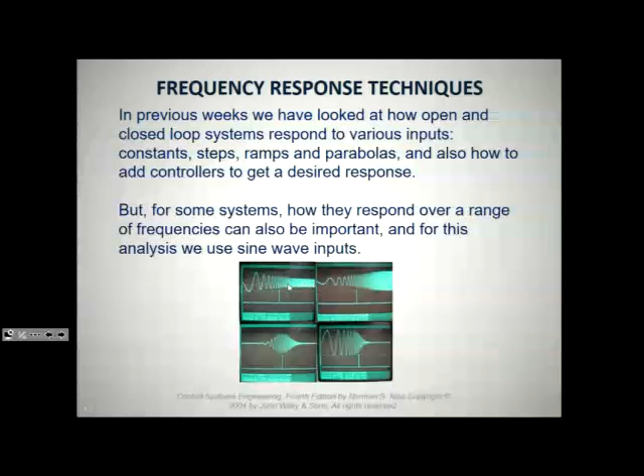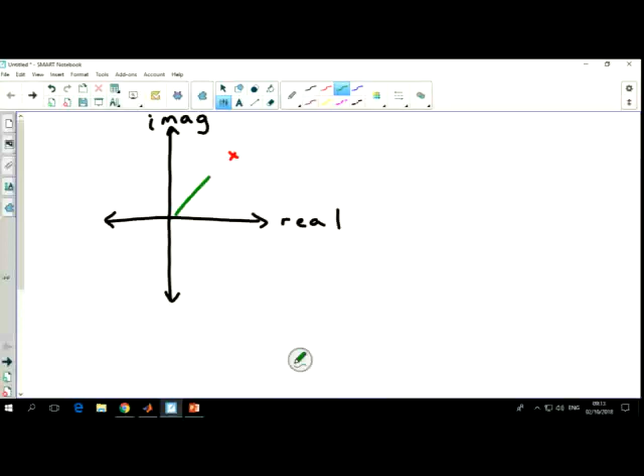Now, to do that, we need to use complex numbers. I did a bit of revision on complex numbers in week 1. So you remember there's 2 ways of representing complex numbers. Well, there's a few ways. On an Argand diagram, your x-axis is the real part of your number, and your y-axis is the imaginary part of your number. Maybe just do a wee bit of revision on these before we go further. Stick to an easy one here, maybe point there. So if you want to represent that dot, you can do it on an Argand diagram like that. Remember, we're thinking about phasors mostly, so in fact, it probably would be like this.

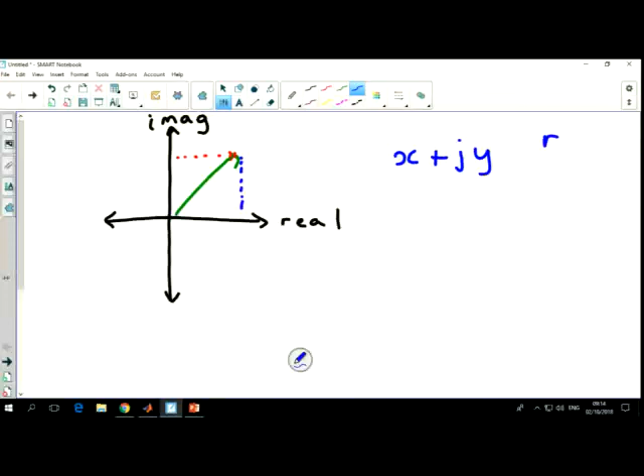There we go. So if I represented that by an x-coordinate plus, you remember what the form was called? What kind of complex number that is? No. Okay, that's rectangular, or your Cartesian coordinates, yeah? They're interchangeable. I think MATLAB calls it Cartesian, but you'll quite often see rectangular. So that's one way of representing a complex number.

It's terrible. I'm just going to try and recalibrate it. I think it was a bit off. Made it worse. That's meant to be an X. That's a bit better. I'm not sure.

Okay, the other way is by length and an angle. Yeah, so this is just a revision from what we did in week 1. So you have an angle here and a length. So you can also represent that same phasor by that. Yeah? And that's your polar coordinates. So just to remind you of that.

A couple other wee things. I don't know, did I do this with you in the first week? If you're adding complex numbers, you use them in the rectangular form. Okay, so plus or minus, you use rectangular form. And divide or multiply, you use polar. Do you remember how to do that? Yes. Yeah, okay, that's fine. I won't need to go over it. So you are going to do a wee bit of division and multiplication of these numbers.

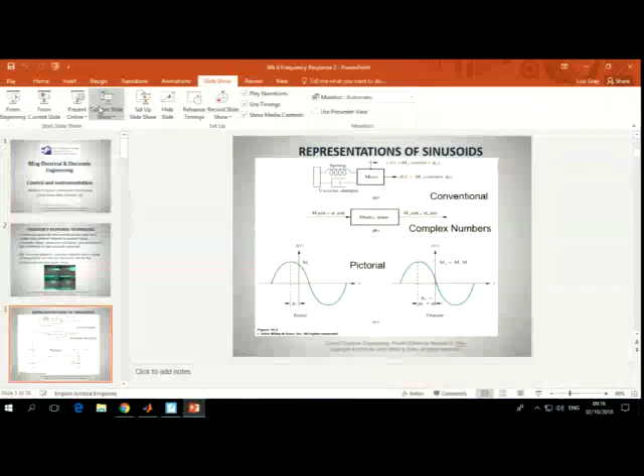So there's just a couple of other ways that you can represent a sine wave using these complex numbers. So that's the amplitude, in this case peak amplitude. Anybody who's doing principles with me, you know we normally use RMS, but for control theory we use peak. And then the phase difference between a normal sine wave, although that one's shifted, and the wave you're interested in.

So you can see here, I don't know how clear that is because my projector's not great, but this is our system represented using complex numbers. So it's got amplitude and a phase, which will affect the input coming in here, which has an amplitude and a phase, and give us an output here, which has an amplitude and a phase.

Okay. So I guess in terms of the system, this is like the transfer function, but it's in a different domain. So far you've looked at time domains and S domains, and now we're looking at frequency domain, which is what that's in. So for instance, if you were to put an input wave in like this into this system here, which has this amplitude M1 and this phase shift from a normal sine wave of theta 1. That's not theta, what's that, phi 1.

And then what came out is very likely to be something that's changed in amplitude and also has a different phase shift. Systems often do that. For instance, I don't know if you know much about op-amps, but an inverting op-amp would give you a 180-degree phase shift. A transformer wound in two different directions gives you a 180-degree phase shift. So you can consider them as systems, and they're causing a big phase shift to an input signal, yeah?

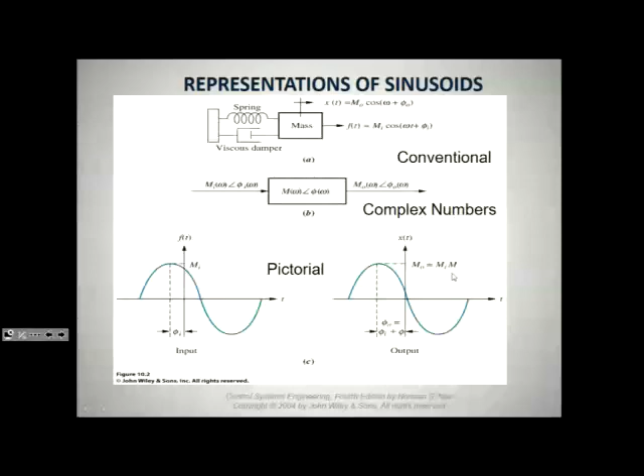Okay. So we can then rewrite the system transfer function as we did, as an amplitude and an angle, which is what we're talking about there. When we talk about angles, we might be talking about radians, or we might be talking about degrees. They're pretty much interchangeable, just with a magnitude factor.

Okay, so if we want to look at how our system responds in the frequency domain, what we can do is take our Laplace transformed system, so that's the one with all the S's in it, and change all the S's to a little term called J omega, where omega is frequency in radians per second, and J, what's J? Do you think? Square root of minus 1. Square root of minus 1, yeah. So J is your complex variable, yeah? Well, it's not a variable, it's a constant, complex constant. Square root of minus 1.

So what we do is we take the S domain system and we change all the S's to J omegas, and then we put in different values of omega and find out what the resulting amplitude and angle is. Yeah, so of course, because we're using complex numbers, as soon as you're working with complex numbers, you're always working with amplitudes and angles, and that's the reason for using them mainly, because it's quite a good way of showing amplitudes and angles, just using numbers.

Yeah, so that's why we use them, because not only can we find out the change in amplitude, but we can also find out what's happened to the angle, if it's shifted or not. So we've got three different ways of doing this.

Now, we tend not to do it on a linear scale, because the idea is that you're changing this frequency from 0, DC, right up to very, very high frequency, infinity. Now, if you tried to plot that on a linear scale, if you imagine trying to go from 0 to, I don't know, 100,000 on an x-axis, you're not going to see small changes, say, between 1 and 10 hertz. You wouldn't see any change on your scale. You wouldn't even be able to plot it, probably. So what we tend to use is a logarithmic scale for both the frequency, which is your x-axis on the plots, and your amplitude, which is your y-axis.

And again, that's because your amplitude can vary a lot. So at very low frequencies, you might get a very high amplitude. This is the way circuits usually work. You might get, I don't know, 50 volts or something like that, if it's a high power system. And then at high frequencies, that might have gone right down to 0.

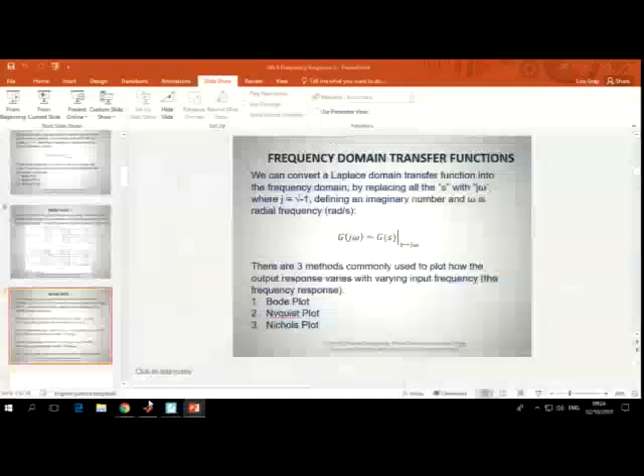So generally we tend to use a computer to do these, and MATLAB's fantastic at doing these. I can show you on MATLAB. Maybe I'll show you it now. So we can define a system. I'm just going to make one up. I don't know what sort of Bode plot it will have, but, trying to remember how you do this. I think that's a comma there.

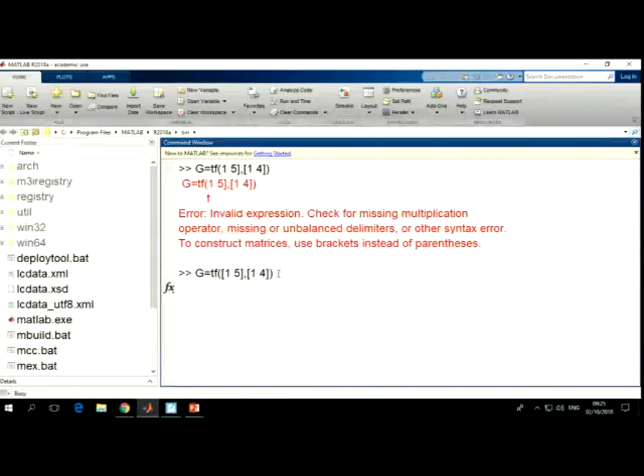Okay, so if I run that, I forgot to put the first bracket in there. Yeah, I forgot to put the first square bracket in. So do a bracket there. Okay, so I've just defined a transfer function. See, I just typed that in, so you can get used to doing this yourselves.

We talked about poles and zeros last week, I think, didn't we? And pole zero diagrams. So what's the system got in terms of poles? How many poles has it got? One pole, defined by the denominator. So it would have a pole at minus 4? Yeah. What about zeros? 1. 1 zero at? Minus 5, yeah.

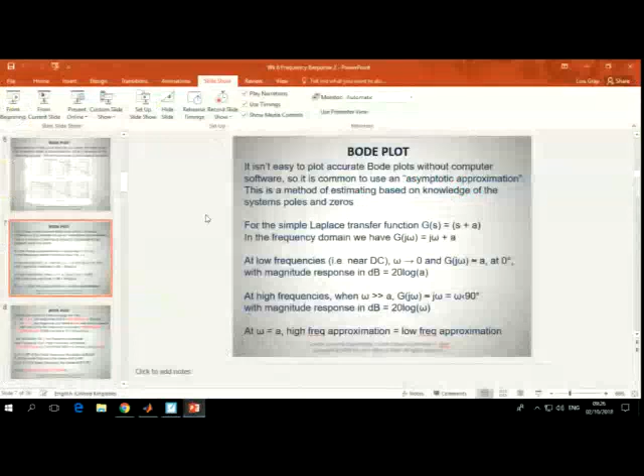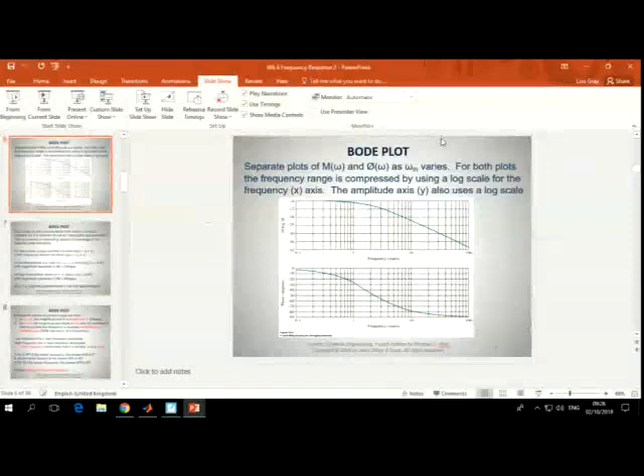Okay, so actually they relate to the points on the frequency graph. Switching back to this frequency graph. They relate to these points where the slopes start to change. So in fact, that point there would be a pole. And a zero would cause a slope going up the way. But we'll talk about that in a minute. Let me show you how to do this. So I can do a Bode plot of this system if I just type in bode G. I think that should work.

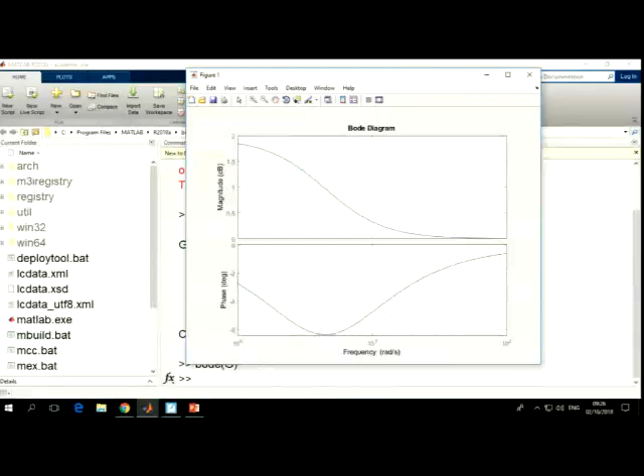No idea what it's going to look like. Probably a straight line since I've got one pole and one zero. Okay, it's not a straight line, that's fine. Okay, so that was just a completely random function, but here you can see how it's done the Bode diagram really quickly for me. This is the amplitude, and that's the phase. I just wanted to show you that. We'll do a bit more on MATLAB later on, but just while I was on that page anyway.

Okay, so we're going to look at some simple functions to start with, some simple systems rather. So we've got, first of all, a system with just a single zero. So that's just a numerator. There's no denominator there. So replacing the s with j omega, like I said to do, and then looking at what happens to the function as omega is put to different frequencies.

So we can start by making omega 0, which is effectively DC. So that's not putting a sine wave into the system at all, that's just putting a DC signal in. If you make omega 0, then you end up with this function just being equal to A. Okay, so we could work out the amplitude of that system just by doing 20 log of A. And there's no phase shift there because we've got no imaginary part. If you only have a real part, you have a 0-degree phase shift with a complex number. Does that make sense? So that's along the x-axis, essentially.

And then if you go into high frequencies, so we're making omega much, much bigger than A. So saying that maybe omega's, I don't know, 100,000 radians per second or something like that. It's very unlikely A would be anything like that sort of number. So A kind of disappears in the equation then, and you're just left with the j omega part. And if you convert that to your complex numbers, that gives you a magnitude of omega and an angle of 90 degrees. Because referring back to our Argand diagrams, anything that just has a j term is along the y-axis.

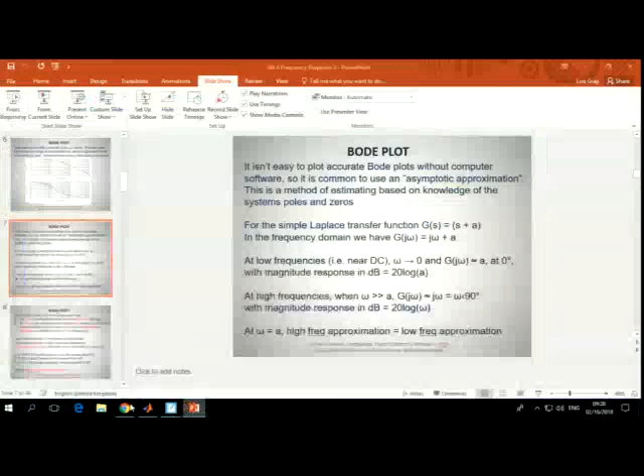Do you want me to show you that? Just switch back to that. Yeah, so anything that's just got a j term is just going to be on this axis here. So it's obviously got a phase shift of 90 degrees. Okay. And then at the frequency where omega is actually equal to A. So this is called our low frequency approximation, and this is our high frequency approximation. And if you make omega equals A, they actually become equal.

So what you find out is, for this particular system where your system's defined by s plus A, that's your Laplace transform of your system, at low frequencies, you've just got a straight line, which has this amplitude. At the point where omega equals A, in this case, this will start to rise because it's a zero. Okay, so it starts to rise with an increase of 6 decibels every time the frequency is doubled.

And of course, you could actually work that out. If you go back to here, you could have put in different values of omega, and you would actually get an answer here if you had real numbers. And you could plot that manually, plot by plot, and you would see what would be happening. But you can just believe me that when you have a system with just a zero, it'll start to rise, and it'll rise, we normally use this term, 20 decibels every time the frequency goes up by 10.

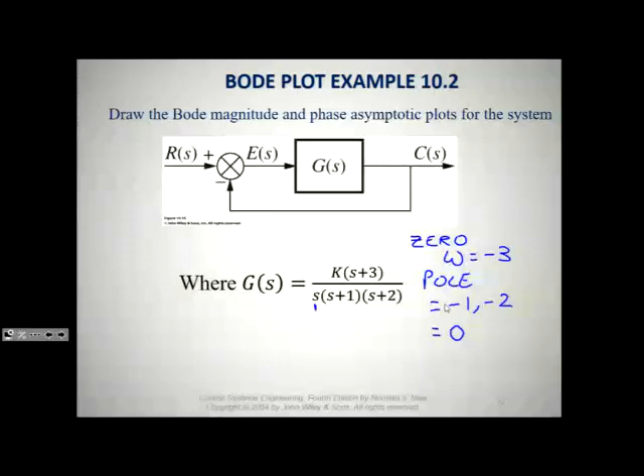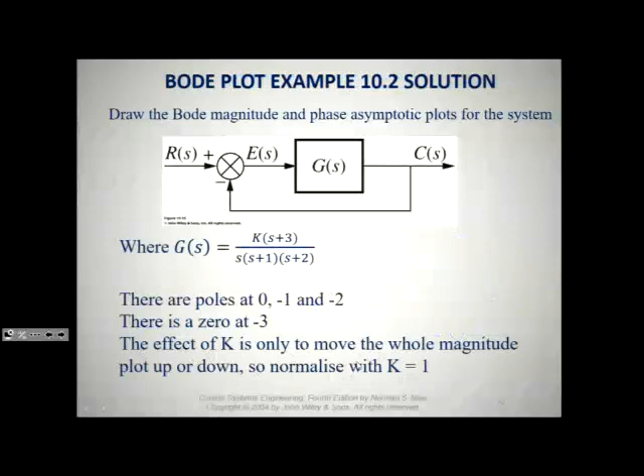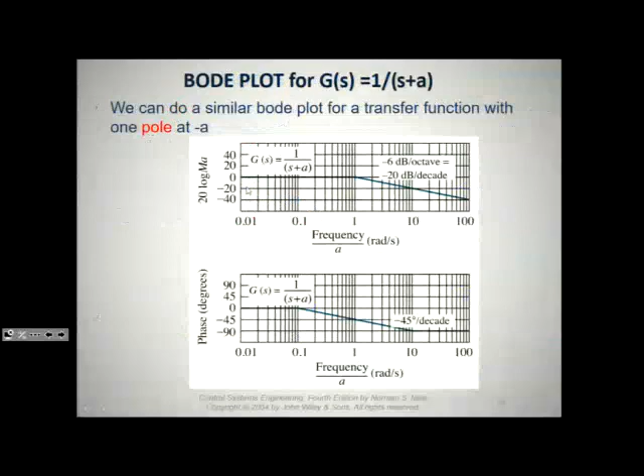But we don't know K, so I'm not terribly sure how we're going to plot that. Maybe just assume K is 1. That makes sense—everybody understand that okay so far? I'll show you the plot then. There's the answer, which you got, which is good. So we're going to start with K equals 1. It says here the effect of K just moves the whole graph up and down. If you change the gain, this point will go up, so the whole graph will either go up, or if it's a low gain, it'll go down.

So even by the time we get to 0.1 radians per second, we're already going down at minus 20 decibels per decade at that point. And then we've got another pole at minus 1, which is going to cause another minus 20. Another one at minus 2, which is going to cause another minus 20.

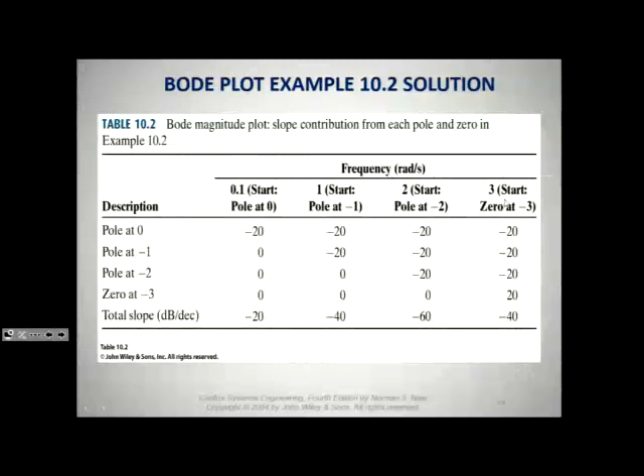It's probably easier just to show you the graph. And at this point, the zero is going to have an effect and negate minus 20 of that, so it'll not drop so steeply, but once it gets to 3, it'll drop at minus 40, I think. I did try and draw that—it's not possibly very well drawn, but hopefully you're able to see it.

So this slope here is due to the pole at 0. This slope here is due to the pole at minus 1. This slope here is due to the pole at minus 2. And then you can see here it's gone back to being more like that, and that's due to the zero at minus 3. Does that make sense? Yeah.

They're quite difficult. What do you mean it's due to zero? What's that—it's due to zero? How does it change? This is due to zero at minus 3. How come it's plus 20 then? Because of the zero on the top line.

So going back to—every pole gives a minus 20, every zero gives a plus 20. Oh right, yeah, so that cancels out one of those. Yeah, cool, good—that's good if you ask questions because it means you're actually listening as opposed to just sleeping. Right, okay, so that would be a magnitude plot. The magnitude plots aren't too bad.

Trying to do a phase plot of this would be actually very difficult to do manually, because obviously the pole at 0 is going to have an effect. You can't really get a tenth of 0, but it's going to be already minus 45 degrees down by the time you get to...

0. And then it's going to still be minus 45 by the time you get to this 1. And then that's going to have an effect as well from 0.1 up to 10. So they all overlap each other, and it does get really, really difficult to plot phase. So I don't think I've done a phase—they've tried to summarize it here, but I don't think I've actually done the plot.

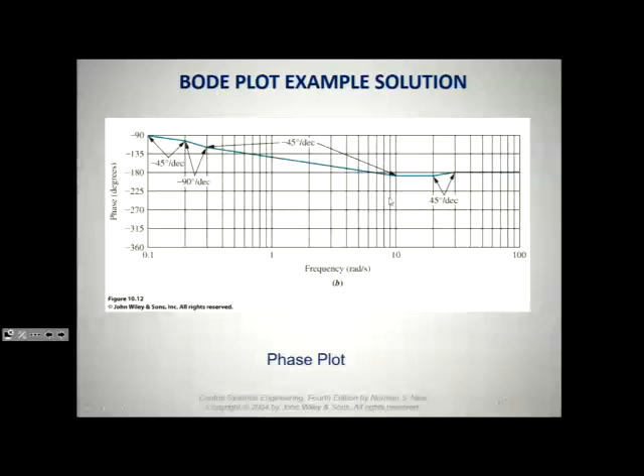Okay, so you can use these Bode plots to determine whether your system's stable. What do I mean by stable? What does an unstable system do? Yeah, it oscillates continuously and probably eventually breaks.

So that's unstable. In fact, to be honest, a system that oscillates continuously at the same amplitude is a critically stable system. But a system where the amplitude builds as you put the input in, that would be an unstable system. But yeah, quite right, a stable system. So it's quite important to know whether our system's stable or not at a range of frequencies.

Because we don't want, for instance, a damper on a car - if you go over a particular level of bumps, you don't want the car to bounce bigger and bigger until your shock absorbers break, yeah? So you want to be able to check this.

So the definition of stability is that, with negative feedback, if the gain of the feedback is greater than 1, or if the gain of the whole closed loop system is greater than 1, while the feedback is still negative, you have instability. You can write that in terms of mathematics by saying you have to have a gain of less than 1, which equates to 0 decibels. If you do 20 log 10 of 1, you'll get 0 decibels. So that relates to a gain of 0, a gain of 1, and this relates to a phase change from negative to positive feedback.

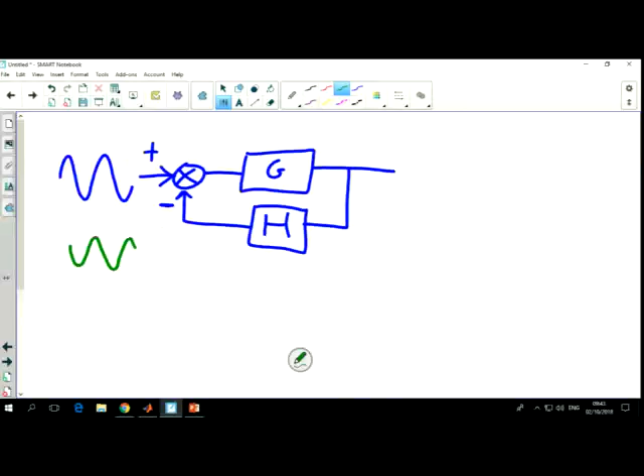By the time this all comes back, you get another sine wave that's in phase with that - sorry, no, 180 degrees out of phase. I don't know if I've drawn that very well, but it's 180 degrees out of phase. And then you subtract that. What you're actually going to end up doing is flipping this over and then adding it, so you end up with positive feedback.

So it's okay if the gain's really low, because what you're adding will be very small. But if the gain's 1 or greater than 1, you're essentially adding the same size of wave to the one you're putting in, and that's going to make your output much bigger, and it's going to make it unstable. So that's what that criteria is defining - that you still have negative feedback. You don't need to remember that, it's just illustrating why that's important, or why it means what it means.

Okay, so with our Bode plot, we can work out whether we have a stable system, and we can also work out: can we add more gain to the system? Maybe our output's a bit small and we want it bigger. Can we add more gain without making it unstable? Can we add more phase shift without making it unstable?

So we've got two terms here. We've got a term called the gain margin, which is the amount of gain you can add before it becomes unstable. And you've also got a term called the phase margin, which is the amount of phase shift. So if you had a system and maybe wanted to change a sensor on it, you might want to check that it's still going to be stable.

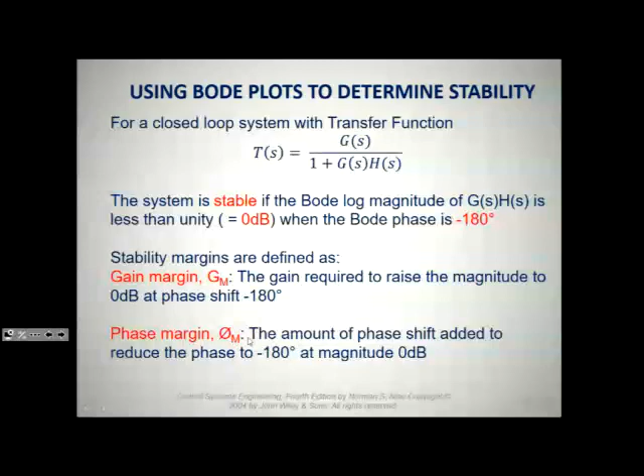You can measure them on the Bode plot quite easily. With the gain margin, if the system becomes unstable at 0 decibels and minus 180 degrees phase shift, the gain margin is the amount of extra gain you can add before you reach that point. The phase margin is the amount of extra phase you can change before you reach that point.

You can read them on the Bode plot quite easily. So for instance, if you had a Bode plot that did something like this - the interesting points are 0 decibels and minus 180 on your y-axis. Looking back at your graphs, the points we're interested in are the ones that correspond to those two conditions.

So if your magnitude plot did something like this, here is the point at which the phase shift has reached minus 180. Remembering these are frequency axes, and they're both the same frequency axis, this would be the frequency in radians per second at which the phase shift has become 180 degrees - that's your minus 180 degree point.

So you could actually add this much gain - you could shift the entire graph up by that much before it would become unstable. Now you wouldn't want to do that, you wouldn't want to shift it so that that was on that point, but it gives you a measure of how much you could shift it by theoretically.

Obviously you don't want it actually at that point because environmental factors might play a part, gains might change, and then you could end up with an unstable system. But anyway, does that make sense? Can you see that okay? Yeah, the same applies with the phase shift.

With this particular system, we have a phase round about a lot less than minus 180, maybe minus 90, minus 20, I don't know whatever that reads, at the point where the gain has dropped to 0. Gain normally drops because there's normally more poles in your system.

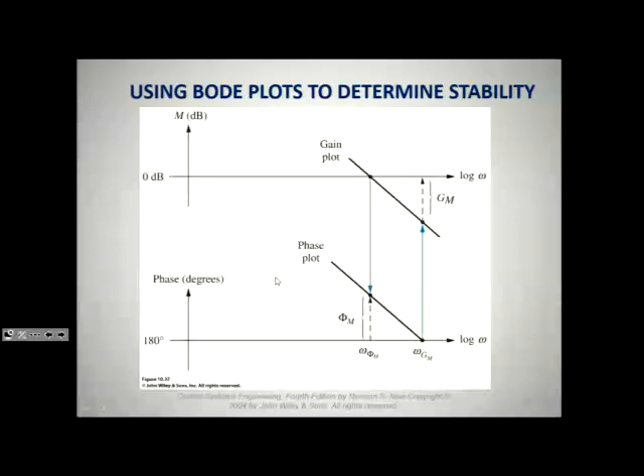Okay, so here's another example. In this case, h is just 1, so we don't need to worry about plotting GH. Normally you do plot GH, but h here is just unity feedback, so there's no transfer function in the feedback path.

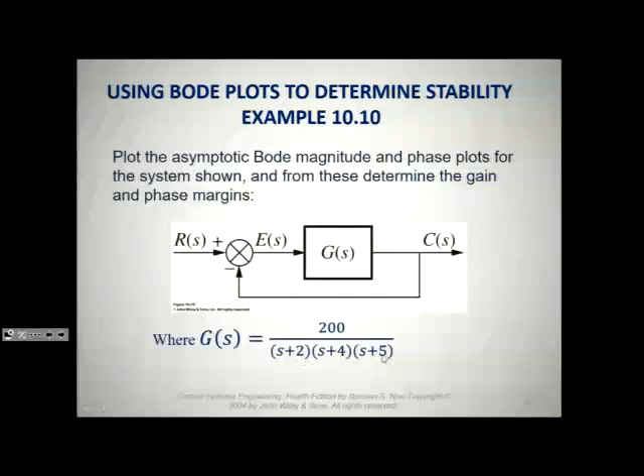So you can see here, this system's got 3 poles, at minus 2, minus 4, and minus 5. It's also got a gain term of 200. So our straight line point on the graph would be 20 log 200, whatever that works out as. Then the gain or magnitude will start to drop at 2 radians per second, 4 radians per second, and 5 radians per second by different amounts.

There's no real reason to multiply that out, I don't think - oh yes there is, because it gives us our low frequency point. Normally you change it to j omega, but you can do it with s as well. What we've really done here is made all the s's equal to j omega, and then made omega equal to 0. So when omega is 0, that term will disappear, this term will disappear, and this term will disappear, and you're just left with 200 over 40 - that gives us our gain at DC frequencies.

S tends to 0 is DC, or j omega tends to 0 is DC, of 20 log 10 of that, which worked out as 14 decibels. And then we know the breakpoints, we've already talked about them. So the first breakpoint is going to give us minus 20 dBs per decade, then minus 40, then minus 60. That makes sense, okay? Everybody still following?

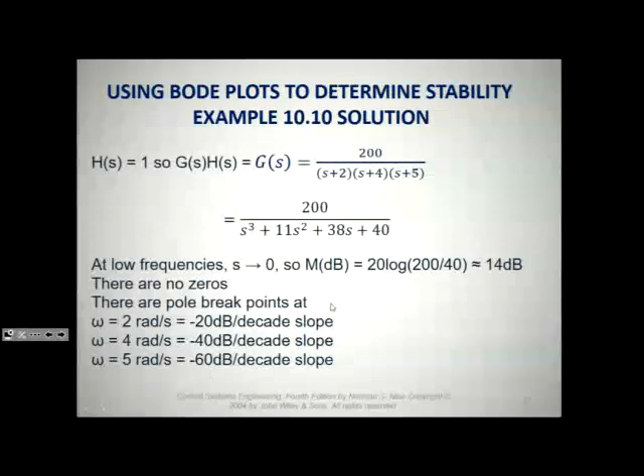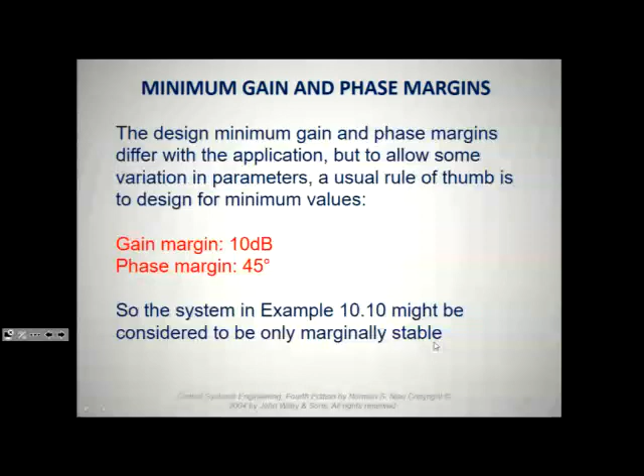Okay, now there's 2 more kinds of plots. If you don't like Bode plots, there's 2 more plots you can use to get these gain and phase margin measurements from. I think the next one's a Nyquist one, which is a really hard one to understand. In terms of Nyquist, I wouldn't worry too much about the theory of how the Nyquist plot works, but just be able to read the plots. There's a bit in the slides about the theory, but we're not too bothered about theory.

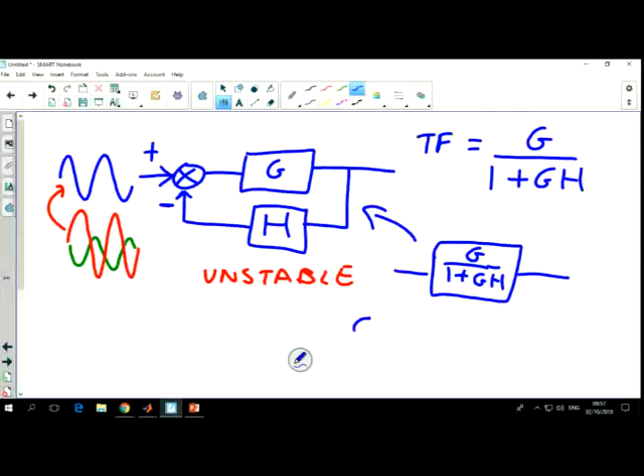Okay, so the transfer function of this actual system, and I'll show you this when we do the block diagrams, is G over 1 plus GH. So you could redraw that system as a single block, and that's exactly equivalent to that. You don't need to worry too much about how we get to that, because we will look at that later. So obviously, if we're just looking at GH, that's not the transfer function of our system. That's the equivalent open loop transfer function. So all these frequency plots are done using just that term there, but they still tell you how the closed loop system is going to respond.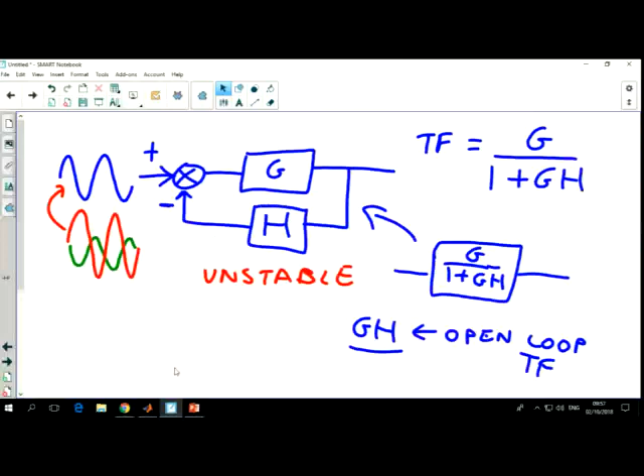I know it's a bit difficult to understand that, but the Nyquist theory kind of explains why they do that a little bit. Does that make sense? Understand what I'm talking about there? That just multiplying G times H doesn't give you the full transfer function? Okay, if you don't understand, you just have to believe me for the moment. We'll see about it next.

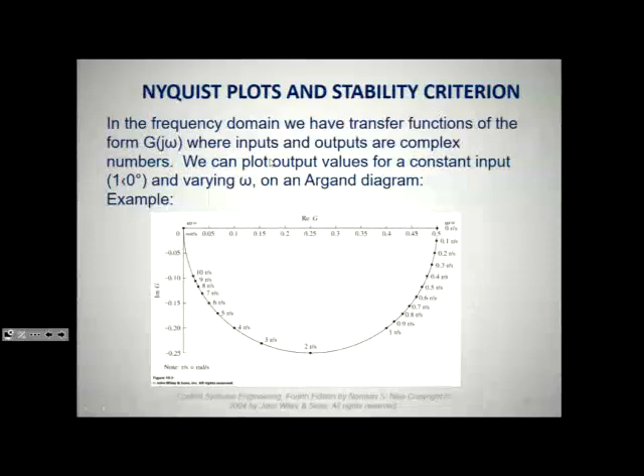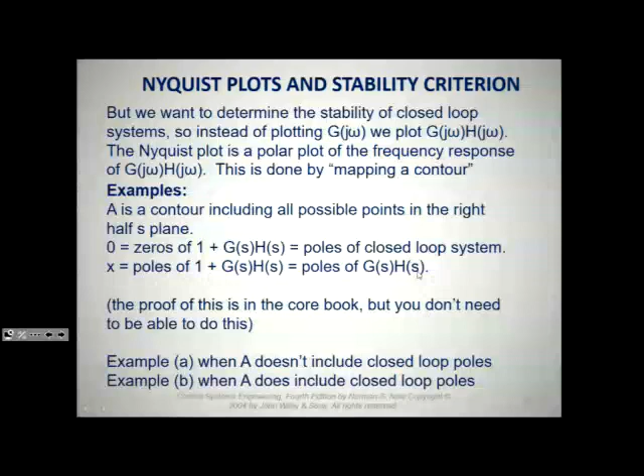Okay, so what we're actually plotting on this diagram is GH, not G over 1 plus GH. And because of that, the poles and zeros don't exactly correspond to the poles and zeros of our actual system. But what you find is that if you plot 1 plus GH, the zeros are actually the poles of the closed loop system, and the poles are the poles of the open loop system. You don't need to be able to do the proof of that, just believe me. We'll also miss that, because that's about plotting, but it's basically showing you the difference between a stable and unstable system.

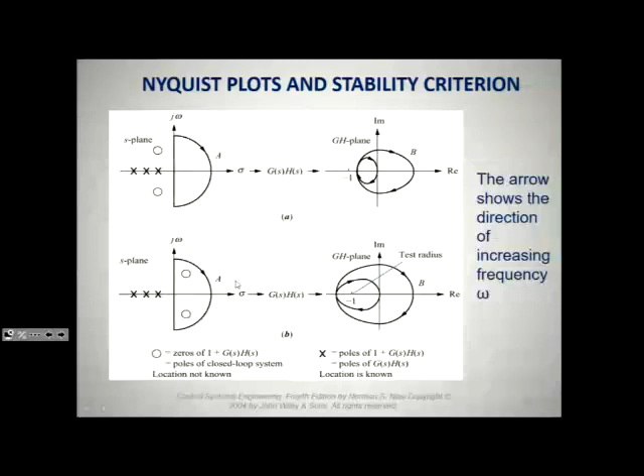So these are zeros, but they become poles of the closed loop system, so that would be a stable system. And this would be an unstable system, because these zeros would become poles and they'd be in the right-hand plane. Did I tell you about that last week, about stability being the left-hand plane? Okay, right. Well, don't worry too much about that just now. We'll also just skip that for a moment. I don't want to make this too difficult for you.

So that's just explaining how this plot works. So at low frequencies, the j omega term disappears, essentially, and you end up with just a straightforward k over a term and an angle of 0, because it's only a real number. K over a is a real number.

And then at high frequencies, the j omega part becomes really big, so you end up with just k over j omega, which tends to 0, because j omega is really big. If you divide by a really big number, you start to get towards 0. So that tends to 0, and your phase shift is actually minus 90 because omega's on the bottom line.

So that term's got a phase shift of plus 90, but when you divide by plus 90, you know if it's a denominator, you then subtract. So it actually becomes a phase shift of minus 90. I don't know why that's a plus there.

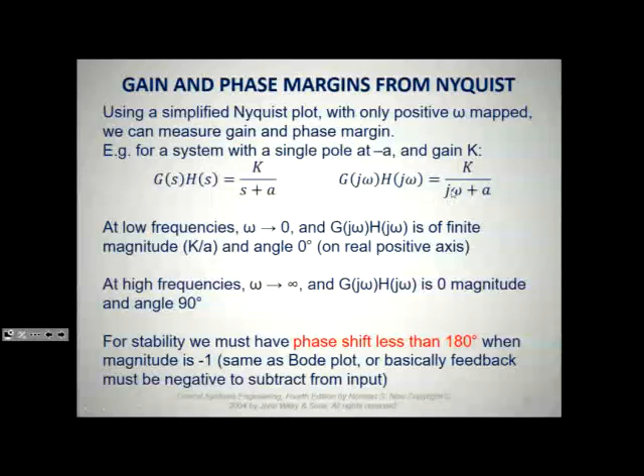So looking at that on the diagram, it looks really complicated, but it's actually not that bad. So this is the phasor that we're plotting while we're doing these diagrams. And we're starting with omega equals 0, so your phasor would be here. Don't draw on that. That would be the phasor when the frequency equals 0.

There's not much to go, guys, honestly. And this is quite tough.

Right, so when omega is 0, that would be a phasor there, which would be on your real axis, yeah? For that one, that would be k over a amplitude. So the length of that phasor would be k over a, the diagram we had before. And then what we're going to do is increase the frequency going around that way. So you might have 1 radian per second, 10 radians per second, 100, and so on.

And watch what the phasor does as we do that. So it's going to change in amplitude, and it's also going to change in phase shift, obviously, as the imaginary part gets bigger. Because that was our function, yeah?

So you can work out the gain and phase margin from this graph as well, because the frequency at which the length of that phasor becomes 1 is equivalent to a 0 decibel crossing point, yeah? So that green is equal to 0 dB. And obviously, when it gets to...

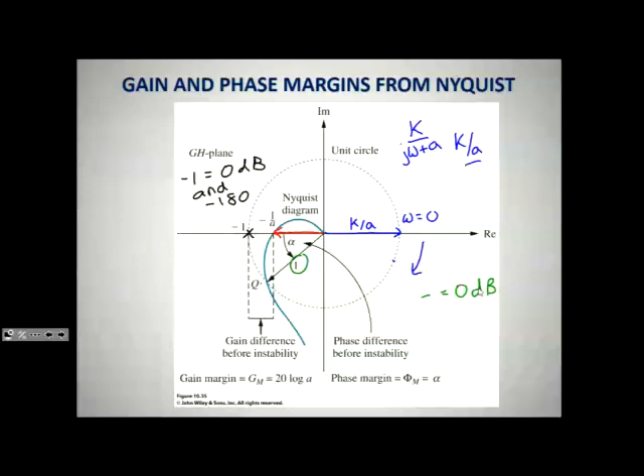So measuring from there, we can measure the phase margin very easily. The phase margin is just that. That's how much we could sweep that amplitude 1 phasor around before it crossed this point. Makes sense? And the gain margin is actually,

what you measure on the graph is 1 over A. It's to do with the fact you've got the division there. So what you're measuring is 1 over A, but the gain margin is actually 20 log10 A. So say you measured 0.5 there, just as an example, then your gain margin would be 20 log of 2. But it's all related to that minus 1 crossing point at minus 180.

So that's another graph. For some reason, control theory people seem to like this graph. Electronics and electrical people prefer the Bode diagrams. But they both tell you the same thing. I'll just show you how you do that on MATLAB, just to break from the maths for a minute.

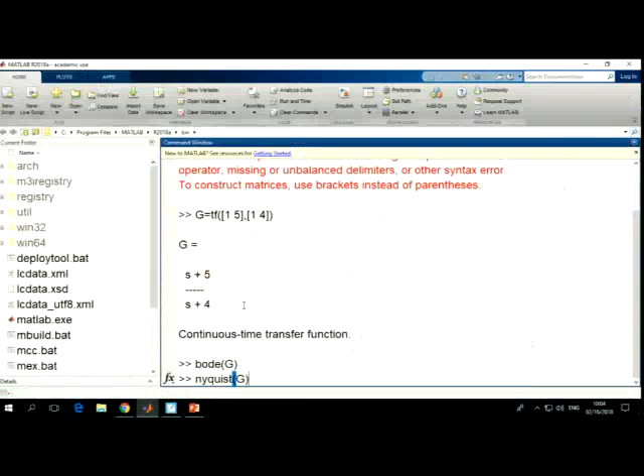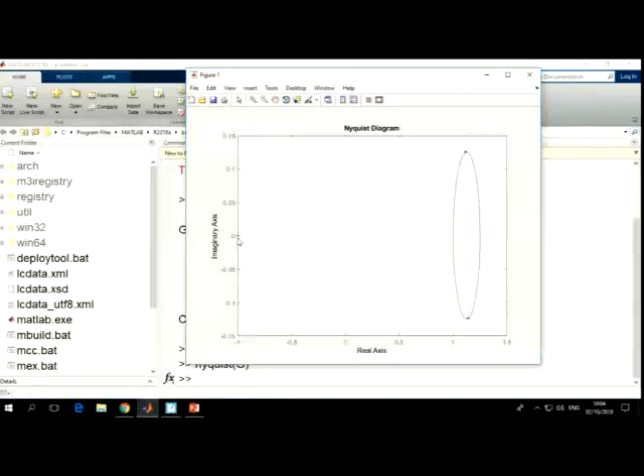So you just type in nyquist G, and hopefully it should come up with a plot. To me, that doesn't really tell you very much, but there you go. This system's totally stable because it doesn't go anywhere near the minus 1 point. This little red cross here tells you the instability point. That system's a bit of a weird system. You get the idea, hopefully.

And then there is one more type of plot. So that's the Nyquist plots. The Bode ones are probably more useful, in my opinion. And then finally, I think we'll miss that out, because I think you've had enough maths, am I right? You can come back to this yourselves later.

Or do you want me to go through it? Should I just go through it anyway? What do you think? Well, you can always look at the video later if you really want, can't you? Yeah, I think I will just go through it. I know some people are struggling, but...

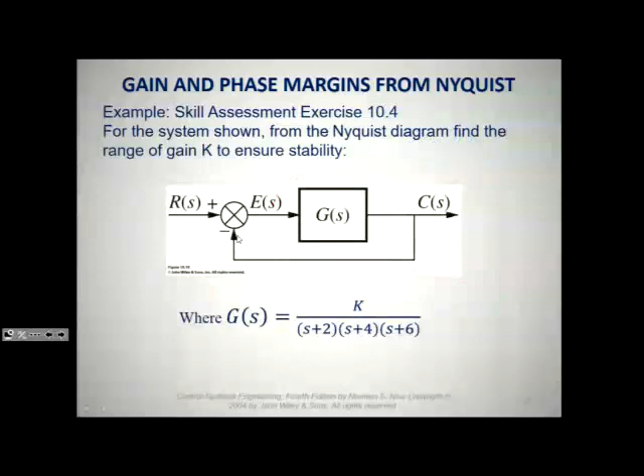Okay, so it will cross the negative real axis when this omega is big enough. Does that make sense? Go back to what we're doing there. Yeah, we're trying to figure out what frequency it crosses this axis at. So it's going to do that when the imaginary part disappears, yeah? So you've got minus omega cubed plus 44j omega. So that comes from this term here. And we want that to disappear because that's the imaginary part.

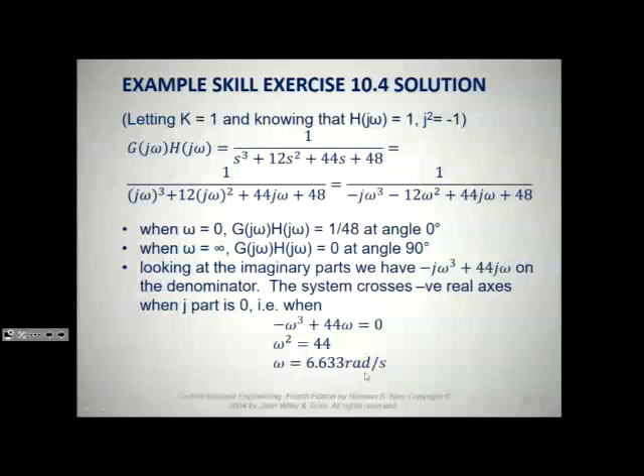Obviously if you're crossing the real axis, there's no imaginary numbers involved, yeah? There's no j part involved on that axis there. So we're trying to find out what value omega is at that point. So that's 6.633 radians per second. Hopefully that makes sense.

And then it's just a matter of putting in that frequency, because that's the frequency at which the system would become unstable. That's relating to this point here, or a phasor along that axis. So that's where our system would become unstable if our line was long enough. Yes, we're trying to work out how long that line can be. And it's quite easy to do that.

We just put in the frequency at which that phasor crosses the negative x-axis, and then work out what length it is with a gain of 1. So with a gain of 1, it's 1 over 480. So we could actually increase that k value, which we initially set as 1, up to 480. Then you have 480 over 480, which would give you 1, which, going back to this, would then give us that point there. A phasor that would go from there right out to this point.

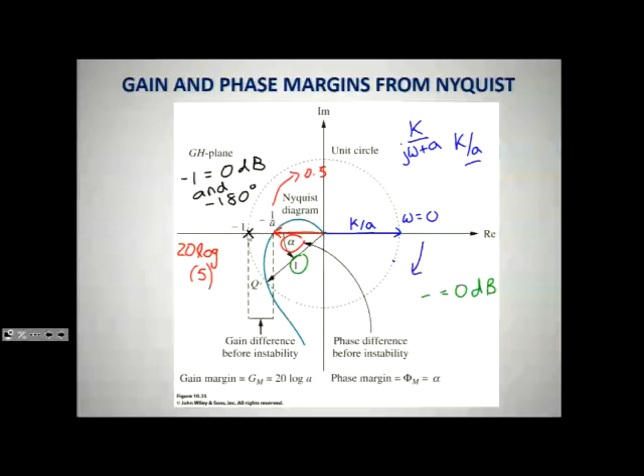Okay, I don't know how much you understood of that, but hopefully you can replay the video and follow it later on. Okay, so this is obviously a very stable system because we can increase the gain up to 480 before there's a problem, which is quite a big number.

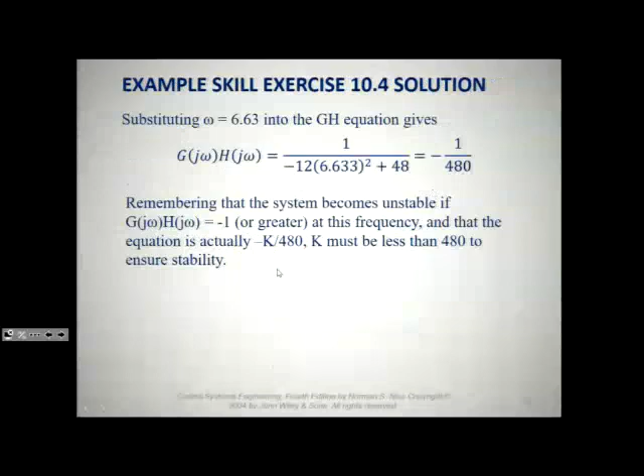And that's just showing you the solution, yeah? So that's showing you that at this value of omega, the phasor along this axis here is just that little bit there. So we could actually make that much bigger.

Okay. Right, Nichols charts are the third type of charts, and they're just a plot of gain and phase on the same diagram, so they're a little bit similar to the Bode plots. They're actually quite easy to read, but they're not used very often. I'm not very sure why. I think in RF theory they're used more often. So there's only a couple of examples of Nichols charts. There's not much more to them than that.

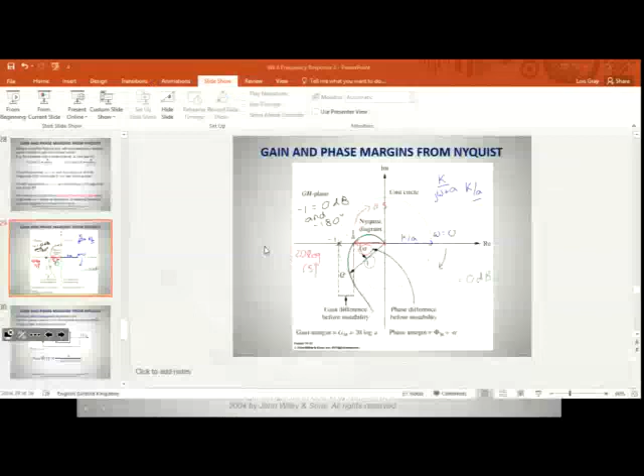I know the graphs aren't very clear. But again, this was done just using MATLAB. It's really easy to do again. Go into MATLAB, you can just type, what was that, nichols? It's going to look a bit weird because it was just a weird diagram, but there you go. So that's one way of doing it.

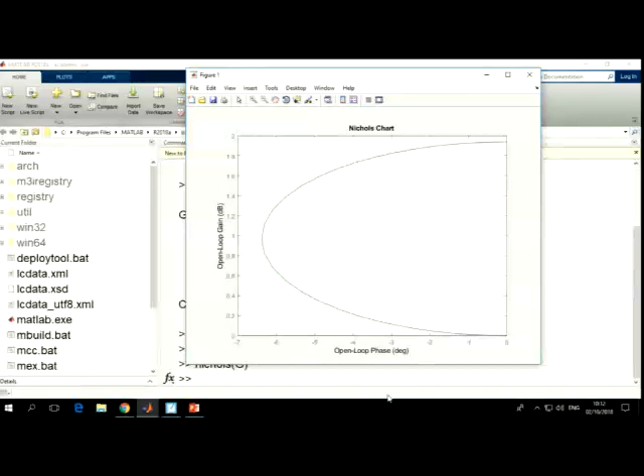The other way of doing it is in Simulink, and I'll show you that too because you're probably going to be modelling your systems in Simulink. So with your coursework, what you have to do is pick some frequency points. Probably the best ones to pick are 0, infinity, and any breakpoints that you have, so any poles or zeros, and work out by changing your s values to j omega. Let me write this down, it's probably easier. I can't remember what number it is in your coursework, it's right near the end.

So by the time you get to that point in the coursework, you're going to have a system GH equals transfer function. So you'll know what your transfer function is. Okay, so next thing you want to do is change all the s's to j omegas. Okay, then pick some frequencies. Of course, in radians per second, not hertz. So the ones I would suggest, certainly go for 0 to get your low frequency magnitude. The phase will be 0 there as well.

Infinity, you obviously can't actually type infinity into your calculator, but from what I've showed you, if you make omega infinity, then the amplitude becomes very small, goes down to 0, and you can check what your phase is. And then your breakpoints as well. So your breakpoints would be wherever your poles are, or wherever your zeros are.

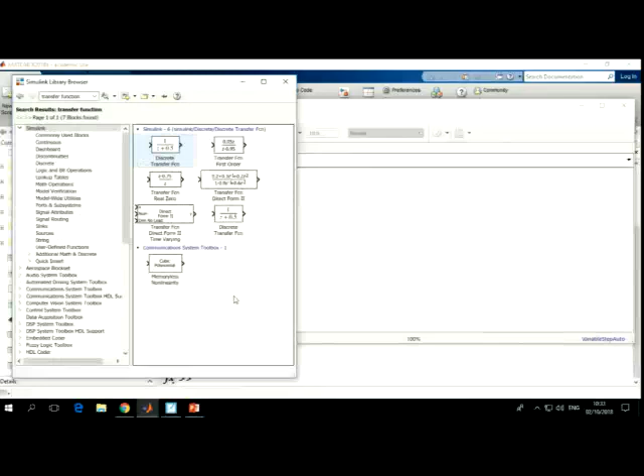That didn't even give us the right ones, actually, to be honest. But maybe it's because I never gave it time to finish searching. I know that my transfer functions are in the continuous block.

It's this one here. It actually says 1 over s plus 1. I know it's a bit small, so you can left click and drag it onto your windows.

Always, if you're doing this for reports, make sure I can see what's in the box, because I can actually zoom in on that. Maybe be able to see that a bit better now. But always make your boxes big enough that I can see the actual values in them, not just something that says k, which means the box is too small.

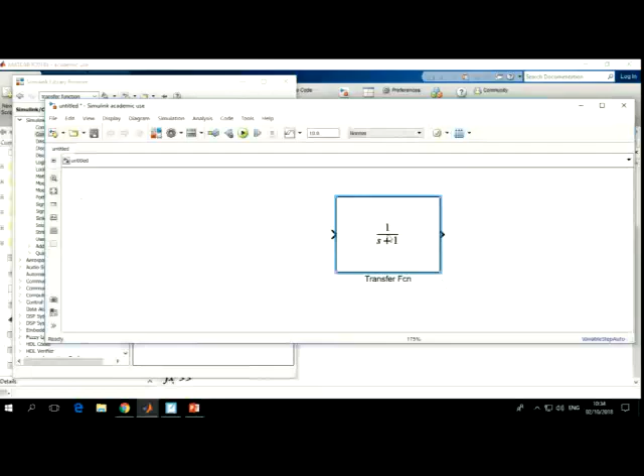So we want to change this transfer function. What was ours? S plus 5 over s plus 4. So if you double click on the box, you get a window like this. And the way it works, from the highest power of s, it adds the pluses and adds all the s's to you, down to the lowest power of s.

So for instance, s plus 4, if we delete that, you need a square bracket, and then you need the multiplier of s. So if it's s plus 4, the multiplier of s is 1. 1 times s is s. And then, was it 5 or 4 on the top line? 5. Okay, and then the 5, and then a square bracket.

And then the bottom line we had s plus 4, so all we need to do is change this second one there, and that should do it. So you can see I haven't put in any s's and I haven't put any plus signs in there. It'll do that automatically for you.

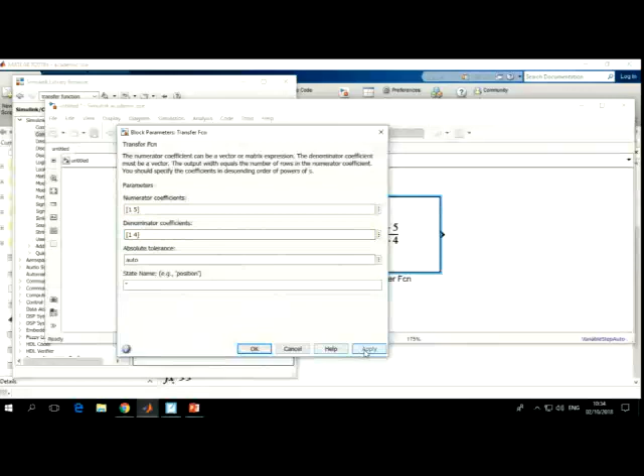Yeah, that should be our transfer function. And then, I would say for Bode plots and Nyquist plots, you're probably best using the analysis tool, but for step functions, you're probably better using the...

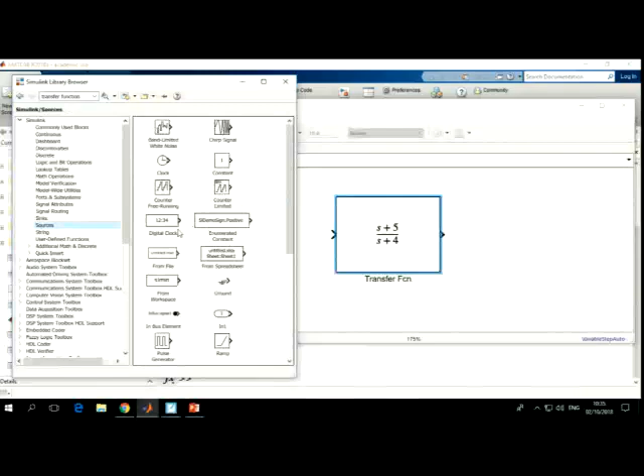Step and scope. I'll show you the step and scope first, because for the first bit of your coursework, you're probably going to need the step and scope. So you've got the step in sources, and you just scroll down till you see it. It looks like a step, so there we go, pop that in there.

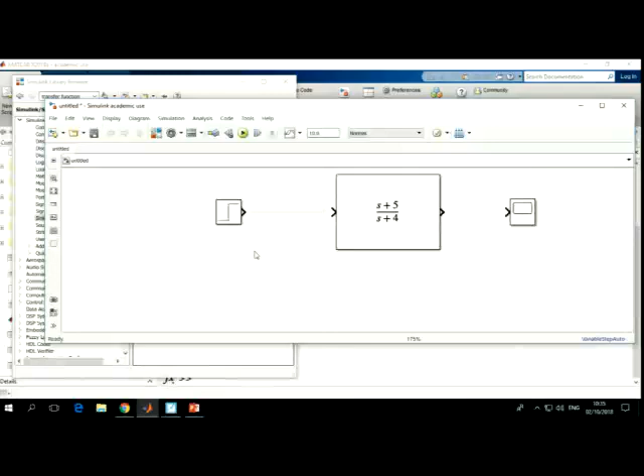I'm sure most of you have done this before. Sinks, you're going to use a scope. Now, the reason I say you're probably better doing this with the step and scope is because you're probably going to need a transport lag delay. Because remember with the Bytronic rig, we switched it on and there was a delay before it started to rise. So to properly simulate that, you're going to have to add in a delay, and that's really difficult to do. In fact, the control analysis tool just ignores delays, so it's not really going to show you a good representation.

So just to show you that, I'm going to add in the transport delay. Can't remember where that is, so I'm actually going to have to search for that.

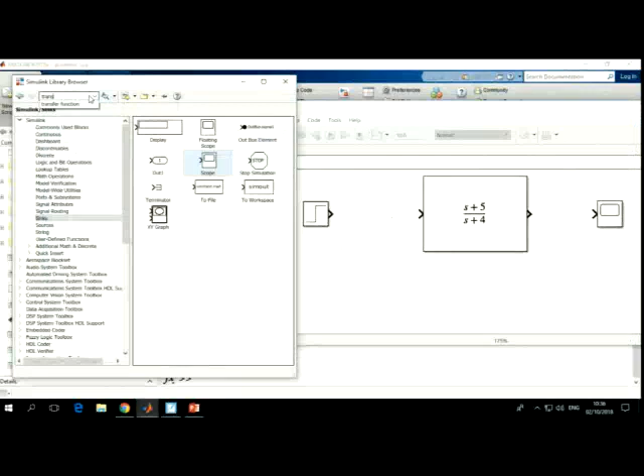This, of course, isn't the right function. That's not the right transfer function for your system, that's just one I made up. Don't everybody hand me in reports with this transfer function, that would be definitely wrong.

Finding the transport delay. I'm just waiting for it to come. Quite slow. Yeah, so there, transport delay. You can add that in, that'll give you your lag time.

I'm not saying this is what your model will actually look like, but just to give you an example. Then up in here, this box here, it's a bit small, but that's the amount of time you're going to simulate for. Is 10 seconds long enough for your system? Long enough for this system. Is it long enough for your Bytronic model?

No, it's nowhere near long enough. I think it took about 200 seconds to go up, so you probably want to simulate for a longer time. You just type in the time you want to simulate, and then click the green button and it will run.

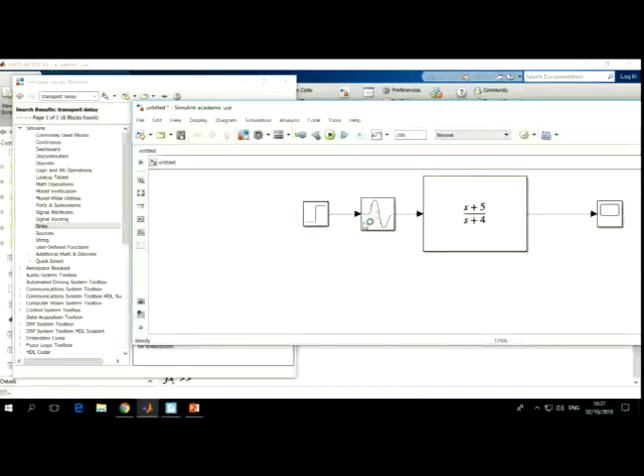There's a little thing down here that should tell you it's running. See that? That actually didn't take very long. And then you can look at your scope. Hopefully.

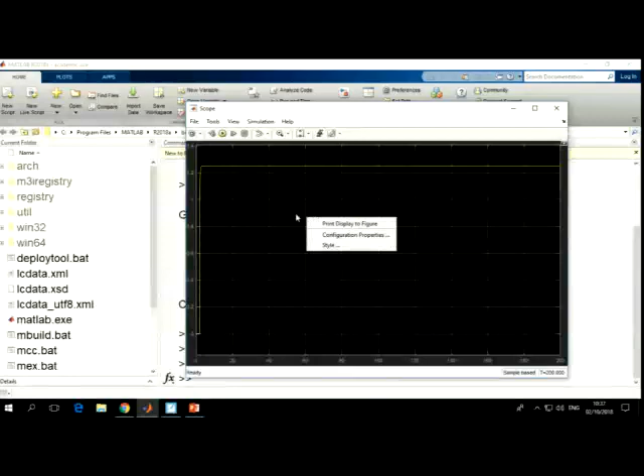I don't know why I did it. Okay, you probably can't see that very well, but you can change it to white, can you not? You can change it to white. If you go into style, you should see it green now, for some reason it's axis colours. I don't really understand why. But that change. And if you want to change the outside bits, that's the other selection.

So you can see there that this is what this particular transfer function has done over that time. You can zoom in and things as well. There's a zoom tool here. No, sorry, that's not the zoom tool. There's a zoom tool here. You can zoom in the x-axis or the y-axis or the total plot. So I want to zoom in the x-axis, I can just do that. Yeah, if you get the idea. If you want to turn that off, you have to click it again, which isn't that intuitive, but that does that. So that's fine for doing your time step type functions.

If you want to do your frequency analysis, which is the stuff we were looking at today, what you're actually better with is adding an input and an output. Or in fact, I wonder if you can do it this way. Depending on the version of Simulink you've got, you can add in linear analysis points instead. So I'll just show you doing that.

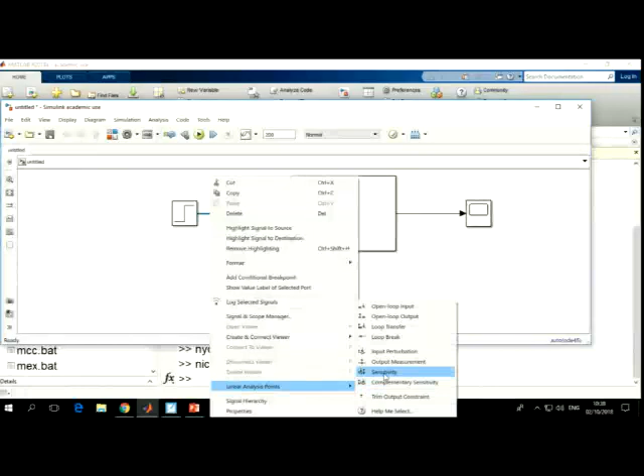So this would be an input point. So what I've just ticked there was input perturbation - that's a long word - and then an output point, linear analysis points, output measurement. So this is only newer versions of MATLAB and Simulink that do this. The old ones you had to add a source, which was an input, and a sink, which was an output. Just show you those as well.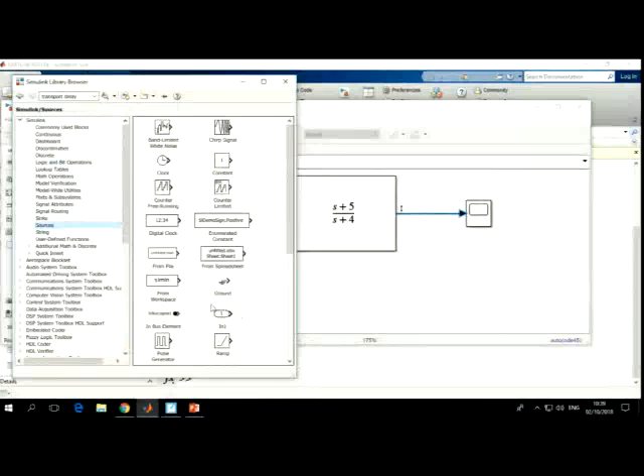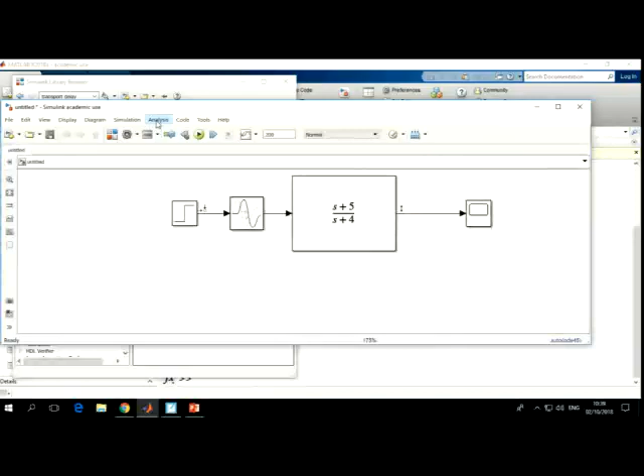So this little block here is an input, and then that block there's an output. So you'd have to replace the step and the scope with those instead, if you've got an older version of Simulink. But if you've got a newer version, you can add these points in, and then you can do analysis, control design, linear analysis. Takes a wee while to run.

Okay, if you've used inputs and outputs, you'll have to change that little box there to say root level inputs and outputs. But because we haven't done that, we've just used model IOs. I think we can leave it at that.

And then, of course, you can use, there's all your graphs there, Bode, Nyquist, Nichols. So go with the Bode one, I think. I've never actually done this with inputs and outputs. We'll see if it works. Looks like it's working.

Yeah, so there's our Nyquist - sorry, our Bode plot for this circuit, or this transfer function. And actually, you can see our infinity pointer is right enough, yeah? Our phase is tending to 0, and our gain is tending to 0 decibels. And that looks about right for our low frequency as well. Worked out about, what, 1.8 or something? That's quite close. Yeah, so, and you could check what it was at the other frequencies as well.

If you want to plot these, you have to go into plots and results, I think. I'm sorry, no, that's wrong. Oh, Bode plot 1. And then that's a print to figure type of diagram. Of course, you can just do a print screen as well, that would still be okay.

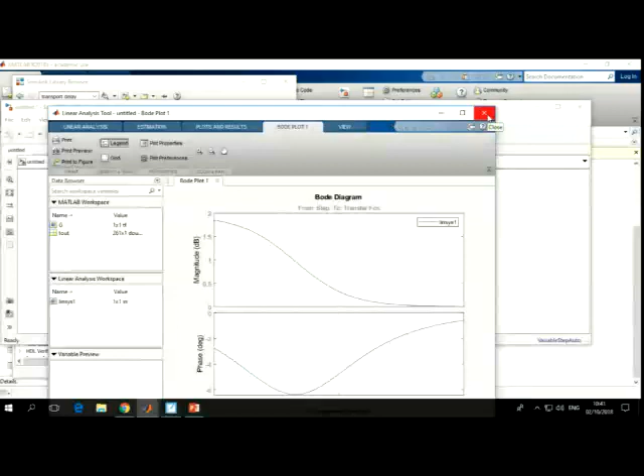You did quite well. I thought you did the calculation well, some of you. Not that easy, this day.